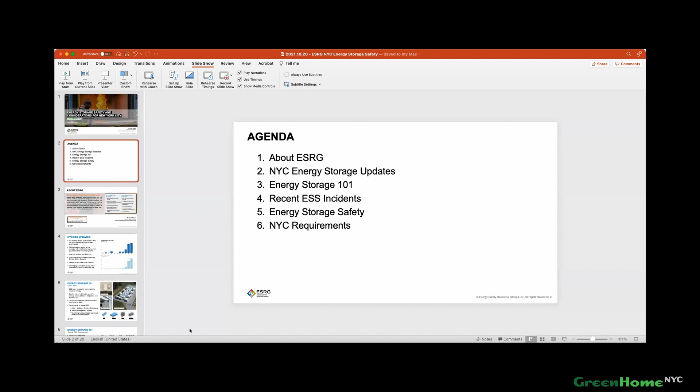I'll just keep flipping through these. Also, Mike, I think you might still need to share your screen. Yeah, it's like the first time I've ever done this, you guys. All right, can you see this? Yep. Right, good. Perfect. I just ate up a minute of time.

All right. So, like I said, Mike Bowes, Senior Project Engineer here at ESRG. We really focus on energy storage safety, and it's really what we were built on. As Crystal was saying, we're at a real inflection point right now in the energy storage industry, and recently there have been a lot of incidents regarding lithium-ion battery fires, which I'll be going over a little bit, but we really exist at the intersection of engineering and fire service, and about half of our team members are retired from the FDNY.

They were pivotal in creating a lot of the code developments in New York City for energy storage systems. We also do a lot of testing, UL 9540A testing, FDNY filing, expediting, ESS design, safety, etc. You can read all these on the screen.

Let's see. So, just as a background, real quick, I also am a volunteer here at Green Home NYC doing a lot of data for them. I've pretty much been working exclusively in energy storage safety in New York City for my short career, I suppose. I worked at Sustainable CUNY a few years ago before joining ESRG, so I was working really directly with the FDNY, the Department of Buildings, and the Mayor's Office of Sustainability to flesh all this stuff out and get the permitting streamlined for energy storage systems.

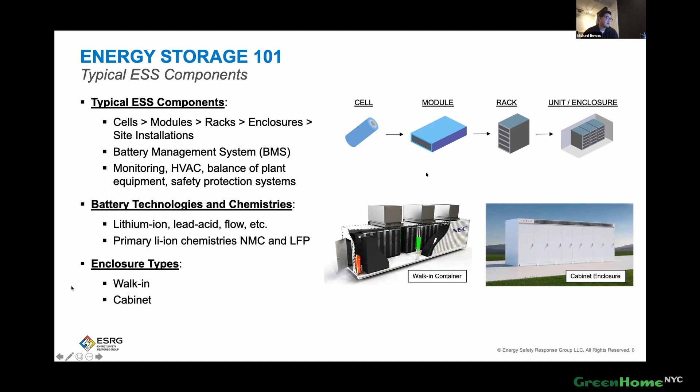Obviously, they're all important, but a big one that I want to point out was in April of 2019 in Surprise, Arizona. There was this battery, a dedicated use building that looks like an ISO shipping container, where a bunch of lithium ion cells failed, resulting in off-gassing, which we'll talk about. The fire department showed up. They weren't really sure what to do. They were sizing up the area. In the meantime, gas had been accumulating in there for hours.

They went to open up a door. The thought process is that they let in an amount of oxygen. The condition inside the container reached an explosive limit and blew up, injuring a bunch of the firefighters that responded. You see this chain link fence. One of the firefighters actually got blown through this fence, landed about 75 feet through it. So there are complications when safety is involved here. And up to this point, there's been very little understanding and training around emergency response for these systems.

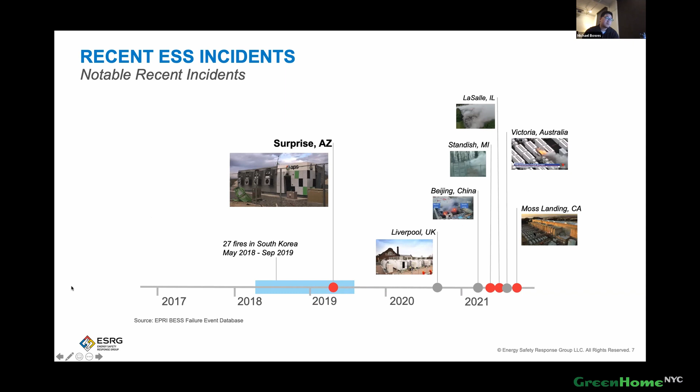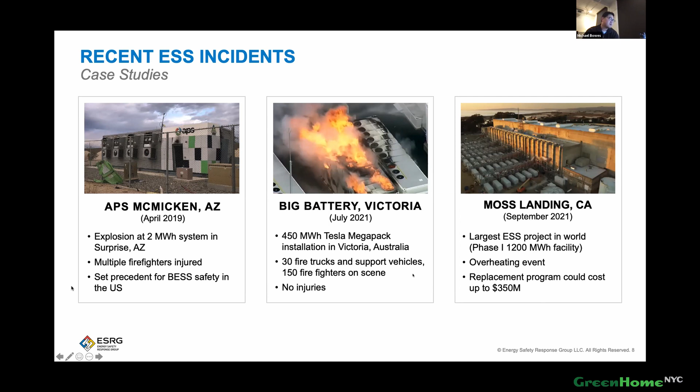Recently, we've also had incidents in Standish, Michigan, and Illinois, Victoria, Australia, and only a month or so ago at Moss Landing, the world's largest energy storage system. This is just another breakdown of those incidents. Again, firefighters were injured, and you're looking at a lot of losses in terms of investment. So it's on people's radars. Really, around 2019, we got a real burgeoning of interest in safety.

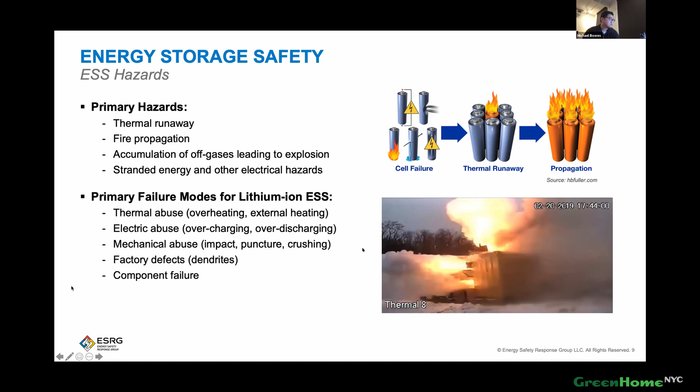There are a lot of different considerations when the fire department's showing up. There's going to be potential for stranded energy staying in these battery modules. You're not sure, if you're shutting it down, what effects that's going to have on the grid. Lithium-ion fires are also just very difficult to extinguish. As you might have seen in some of the Tesla vehicle fires, you'll have fires going on for hours, if not days.

There are approaches and defensive tactics that the fire departments are looking at, in which sometimes it's better to let these systems burn than be opening them up, interacting with them up close, and if there is an explosion.

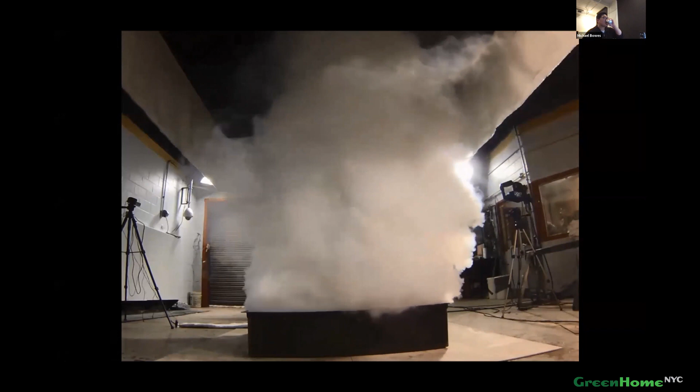Here's just a quick video of some testing. This is the off gas from failing lithium-ion cells. This might have actually only been one cell, but all of this gas, and I know I sound like a broken record, when that is allowed to accumulate in a confined space, and given a source of ignition, can explode. There are different methods of trying to mitigate these risks. Water has been proven to be the most effective for cooling.

Very few things can really stop thermal runaway once it's begun. There are some different gas phase suppression systems out there. You've got some like Novec 1230, StatX, that are good for electrical component wiring fires, things like that, that if they start, can help prevent fires from spreading to battery modules.

Also, there are means of exhausting these flammable gases out via exhaust ventilation systems, NFPA 69, or these deflagration vent panels, which have been big on FDNY's radar. The thought being, if a flammable or explosive atmosphere is allowed to accumulate and blows up, you're going to have the pressure vented in a safe direction away from any first responders approaching the area.

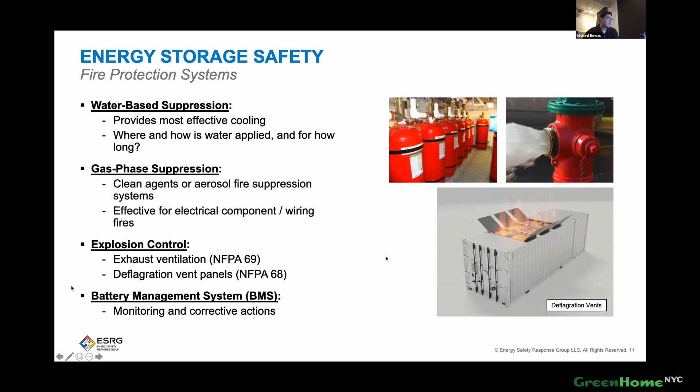Additionally, you have battery management systems for basically all these energy storage systems to monitor the cells, modules, and provide any corrective actions. The FDNY in 2019 provided to a lot of the industries a rule, 60801, for outdoor stationary storage battery systems. And so that took effect October 1st.

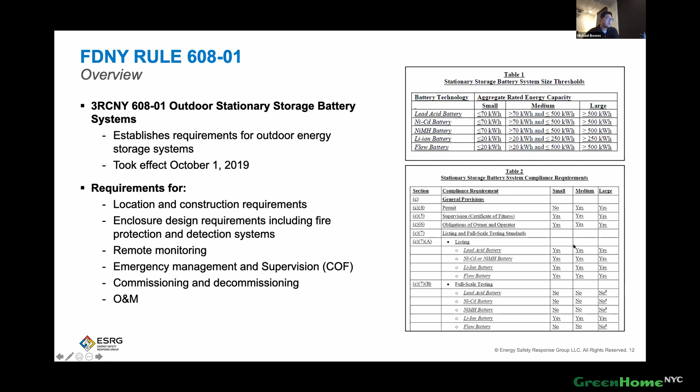So some of these requirements have been of particular note. We provide a lot of filing and expediting of these projects. We've dealt with dozens and dozens of these, and the same sort of issues keep coming up, namely having the right listings, the right certifications, and then UL 9540A large-scale fire testing, in which you're essentially driving battery cells into thermal runaway and seeing what gas accumulates, what the different temperatures are, and using that data to design a safer system. That's a real important sticking point for the FDNY, and they were really kind of pivotal in driving the industry towards using that.

Additionally, for new energy storage systems looking to be used across the city, you need a certificate of equipment approval. For that, you need to apply for TM2. So it's another one of these FDNY forms you've got to fill out. But having the right information for them to review is important and a big sticking point.

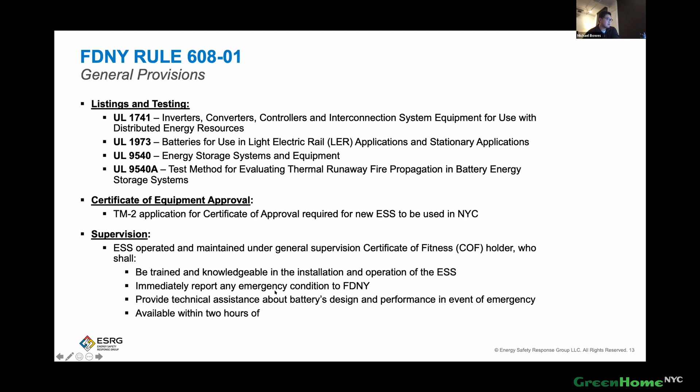Each one of these installations needs to be supervised by someone with a certificate of fitness, a B28 for energy storage systems. This person is going to be responsible for showing up to the scene if there's an incident. So therefore they have to be knowledgeable in the specific system, the different protections that are provided, the location, all of that. They're also supposed to be there within 2 hours of receiving a call.

Important things also are separation distances to different exposures. So that's lot lines, public streets, vehicle parking, etc. They require dry pipe water fire suppression systems designed in accordance with NFPA 15, as well as a big thing that people also have been missing, these fire department connections. They require 2 of them located at different points on the site, another one for redundancy in case they can't reach it, and they can come around to the other side of the site.

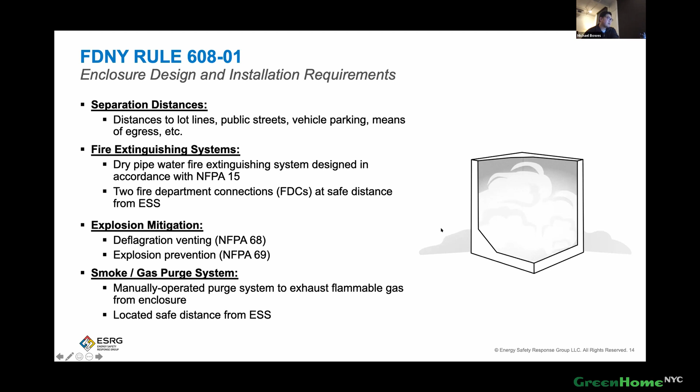And they have also required this smoke gas purge system, which is basically completely unique to New York City, required by the FDNY, so that if they do arrive on scene, they're able to basically flip a switch to exhaust this gas out of the enclosure. So again, you see here gas accumulating. Again, they show up, they have no idea what's going on, but they'll have the switch at a safe location so that if there is an explosion, they won't be impacted adversely by it.

Again, they have additional requirements for energy storage systems located on rooftops. So they'll have some different requirements there: requirements for temperature, vehicle impact, security.

Another important thing to have on your radar is 24/7 remote monitoring of the BMS system. That can sometimes be provided by different system integrators with their systems, but a lot of the time it's up to the developer to figure out how they're providing this, and a lot of people aren't prepared to provide this information when asked about it.

Different electrical component requirements here. 9540 listing is also another important certification that is honestly at this point fairly difficult to get just because of time frames for nationally recognized test labs, their queue being filled up essentially.

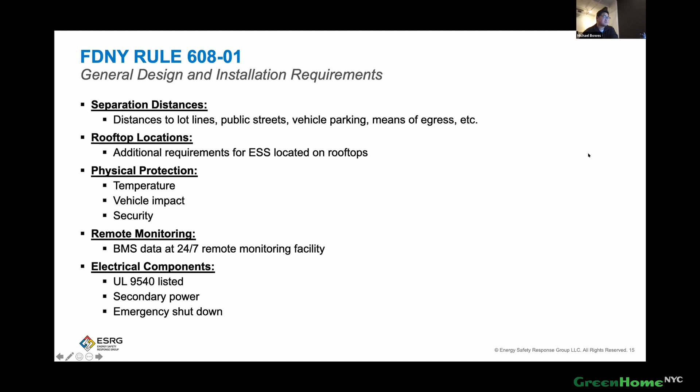Thanks so much, Mike. That was so interesting and a really pressing aspect of energy storage that I don't think we talk about enough. We really have to balance out the need for safety and how we're going to get there with our excitement for the energy transition.

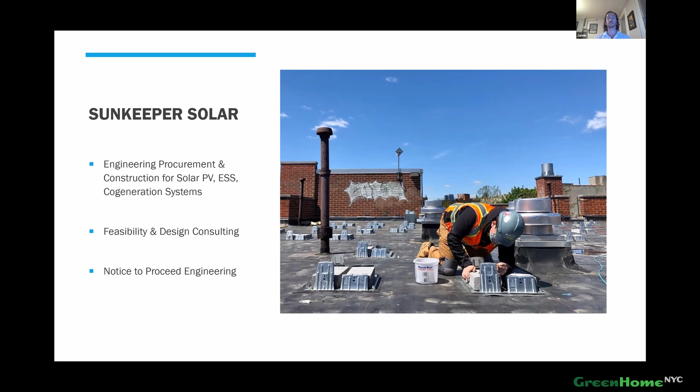And so in order to get it permitted, I'm going to walk you through a few of the first steps. Mike did a great job of bringing up a lot of the issues that you face on the front end, so I'm going to go through how we address a lot of those issues.

So it all starts with selecting your energy storage site. As you can see from these two pictures, one of them is a better site than the other. I think everyone on this call can identify that putting an energy storage system in the middle of Times Square may not be as easy to get permitted as putting it in an empty lot like the one on the right side of our screen.

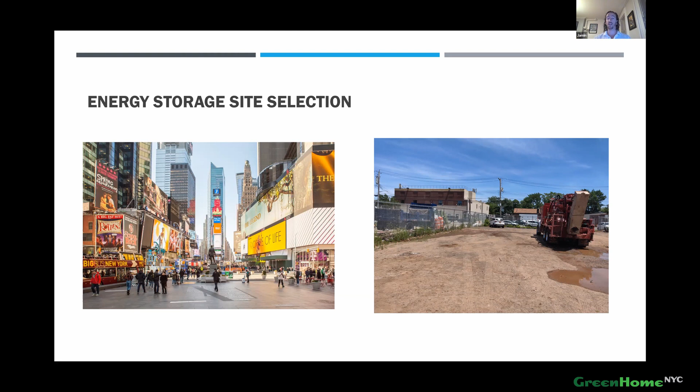Now, this is a pretty easy comparison, but a lot of what we do is helping developers and real estate owners identify the best location for their energy storage system from a safety perspective and from a constructability and therefore a cost basis. Once we go through finding the right site and the best place on your site, we go into our energy storage system selection.

And so there are lots of different options out there. And also, as Mike had brought up in his presentation, there are lots of certifications that are required for New York City, and really a lot of those are not required elsewhere. So we make sure and we look at potential products to help owners identify which type of product they want to go with.

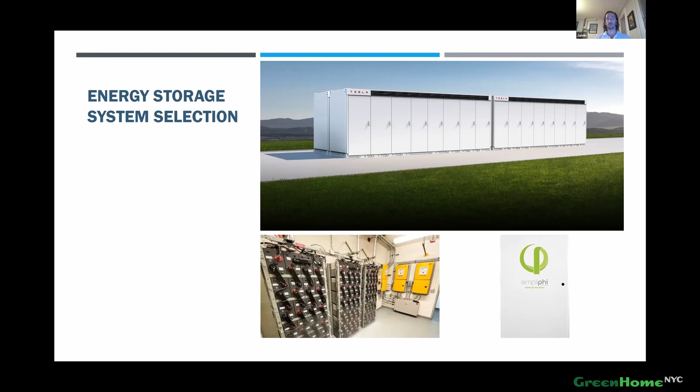We have spent a lot of time working with the Tesla product, which is shown in the top right. The product in the bottom left is a lead acid solution that was actually put indoors, and on the right is a Simpliphi solution.

Once we know where we're putting our system and also what type of product we're going to use, we get into our civil work, our geotechnical work, our environmental work, and our structural engineering. So what a lot of that means is actually heading out to the site. As Mike had showed, there has been a large boom as of late in energy storage systems. And a lot of those, due to the safety factors that Mike brought up, have been going on areas

with more space. So as a part of that, if it's an undeveloped lot, the very beginning is typically us going out, taking care of surveys, doing actual borings in the site to figure out what's there, taking environmental samples to make sure that the site can be developed.

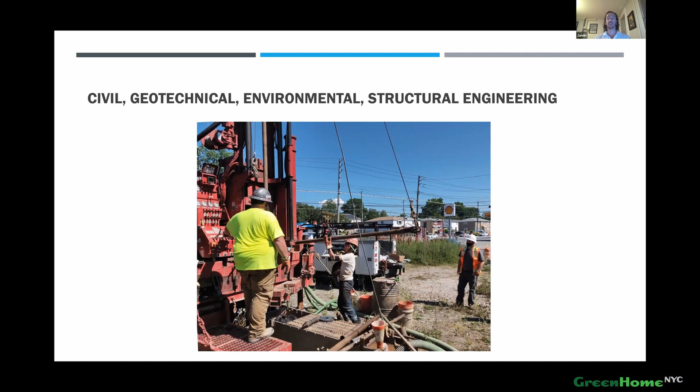And then finally, a very exciting part is the actual permitting and expediting. So there are multiple fire department TM1 applications that need to go in. The number of them and the type of them really depends on what type of system we're doing. There are OTCR2 applications, DOB applications, DEP applications, Con Edison applications, and potentially more if there's any sort of other environmental issues or wetland issues or anything else that could be brought up.

And it's really important when you're developing these projects, right, to identify all of the different AHJs you're going to have to potentially interact with and get them started, because timeline is important, and many of these depend on one another. So you don't want to be held up on getting your letter of conditional acceptance because you haven't started going to a different entity yet. And then at the very end of all that, we get to move into the construction phase.

And so now I just wanted to focus on one project that we were working on in Queens. If you remember my first slide, I was showing a picture of a pergola type system on top of a building. But what you didn't see there, because it's not shown in the picture yet, is the fact that we were actually putting an energy storage system next to it. And Sunkeeper Solar was a subcontractor on this job. And unfortunately, we didn't get time to get our client on board to come join us. So there is some information here that I won't be able to share, but I will share as much as I can with you guys.

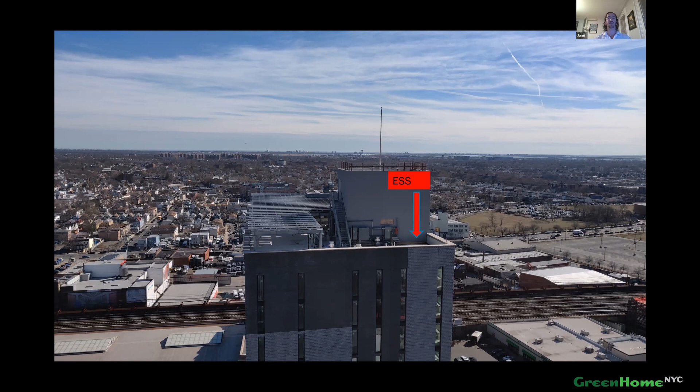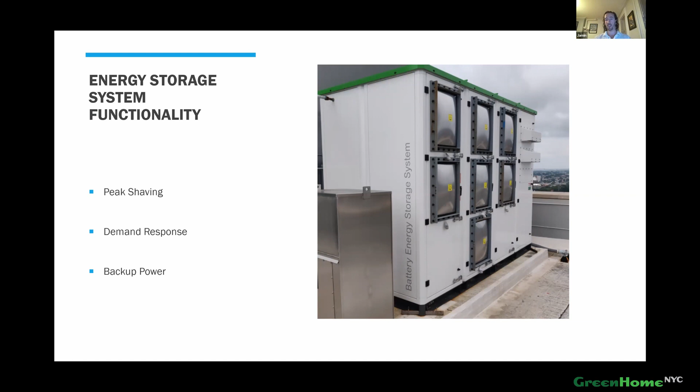And here's the energy storage system that was later installed. And the main thing that I want to bring up to everyone here is that making these systems work in New York City is possible. But it does require enough leeway and enough time in order to make it work. This was a particularly interesting project. The energy storage system is actually used for peak shaving, some demand response, and also backup power. So it was able to help this building in multiple different ways on the economic side and on the resiliency side.

One thing I always like to try to bring up to a group is what was our biggest challenge. And on this project, as it occurs on many others, it's the permitting timelines that you need for the FDNY ESS TM1s and the permitting timelines for the OTCR2 applications. And one question that I'll bring back to the group as a talking point is really just a big part of these permitting timelines, and the reason why they're extended, is the lack of personnel that are available to review them.

So there are tons of applications going in, and also a lot of the individuals that are charged with reviewing these projects, right, are not just doing energy storage work. They're reviewing lots of other types of applications. So they end up with very large backlogs. And we as an industry, right, are happy to be accommodating, and we can certainly move fast, but we need to be able to have a quicker back and forth to move this industry forward.

And I will stop there, and later on allow people to ask questions on the project, kind of give you guys more time to do that rather than me guessing as to what else you'd like to know.

Thanks, Kristen. And our last speaker is Alex Norman, a vice president at Distributed Solar Development, and he'll be sharing with us more about solar canopies. So this will be the solar perspective we're bringing tonight. Yeah, thanks for having me. Appreciate the opportunity to share the front lines of what I do every day, which is the design and engineering and construction of solar canopies.

Similar to the energy storage, I think we've seen a considerable uptick in demand for canopies at our company, primarily because we've been able to achieve a certain cost point that has made it possible. As with developing all renewable distributed assets, we're always challenged with the cost considerations. And so what I figured I would go through here is show some of the more current types of structures that we've been designing for some of our built projects,

as well as addressing some of the common considerations that we have to make early on in a project to establish whether or not a site is viable, which I think is one of the biggest barriers to more people in the solar industry taking on canopies confidently. There's just an added level of complexity and diligence required, and there's a lot of critical things that have to be identified up front, like any solar project, but some additional nuanced ones that are specific to canopies.

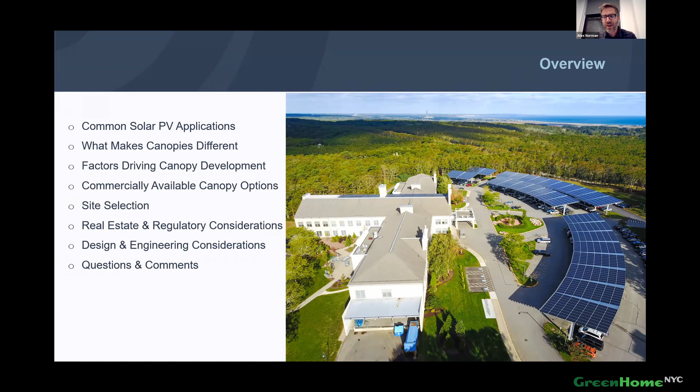So like I said, here's just a high-level overview of some of the things we'll talk about. Sometimes I take for granted whether or not people have experience in the solar industry. I've been doing it for about 13 years now, designing and building solar projects. But I feel like everybody has some idea of the most common solar, right? You've got ground mount and rooftop solar.

Both of which have their own specific challenges when it comes to siting, engineering, getting approvals, and all of that, whether it be structural on existing buildings, reviewing structural and getting roof warranty holders on board, or if it's ground mount with endangered turtles and whatnot that live on these green fields.

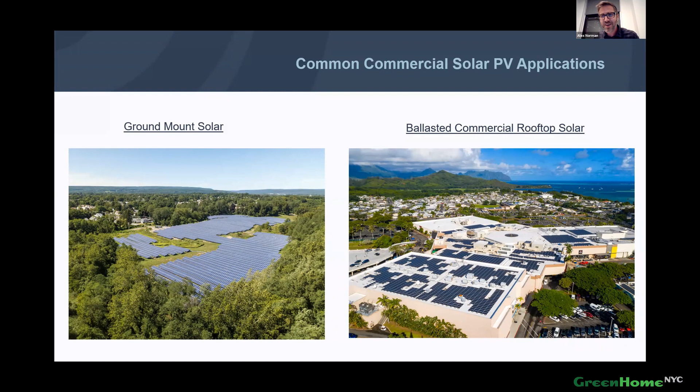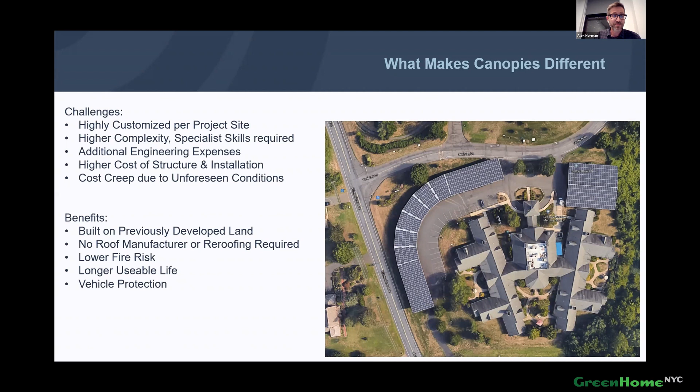They did a lighting retrofit. They have the existing rooftop system, and then we add the canopies in the parking lot. Which is actually quite a feat, right? In my opinion, that a large retail store of this nature could actually be net zero or even energy positive with an on-site system.

And so obviously the best thing going for canopies is if you have a large load and an existing service at a building like this, and you have a large parking lot, it is an ideal situation to put a solar canopy system. Not everybody has a good open roof, but everybody has a parking lot that they would love to put some shade on. It's highly visible, so people make a big PR.

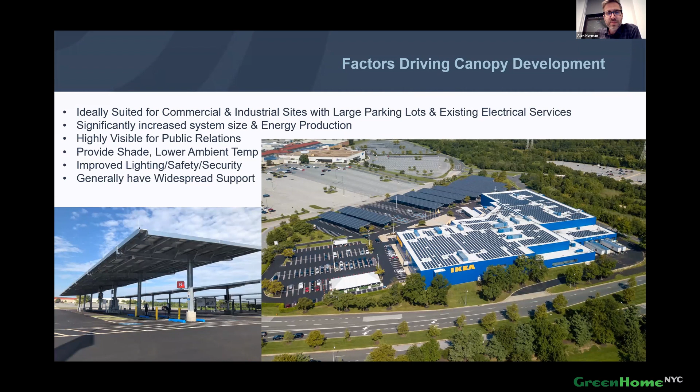It's another way to sort of make solar sexy again after everyone's kind of like, okay, it's solar, we get it, right? But it also shades the parking lot and lowers the ambient temperatures around. And again, they just generally tend to be viewed positively and favorably by everybody who sees them, as long as they don't cause functional problems. And I can touch on those in a minute.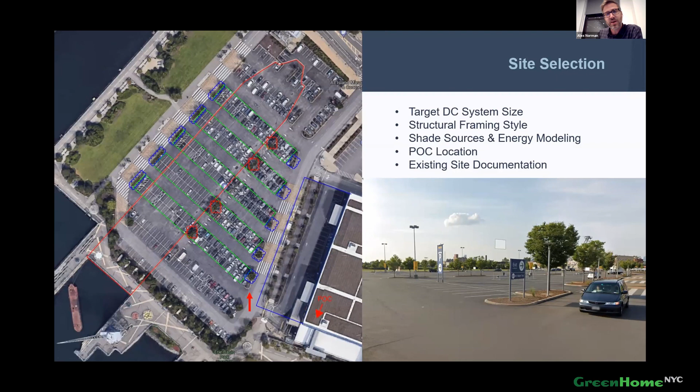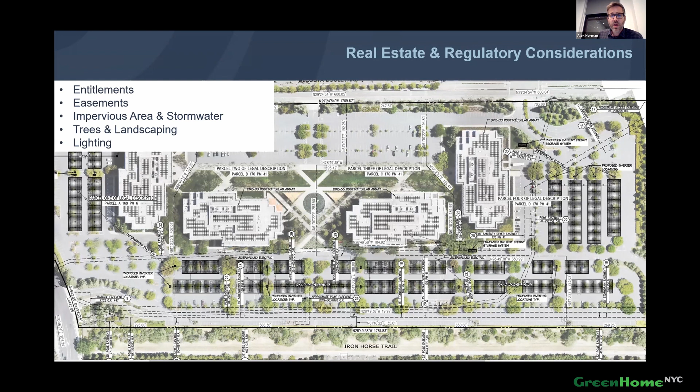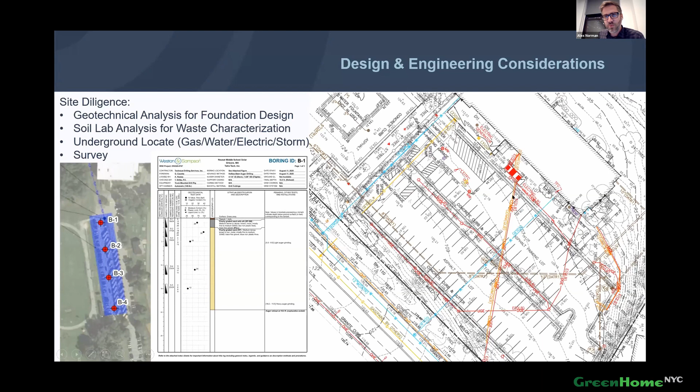Anyway, and then on the right here is just a mark out of really just the mess of which parking lots can be covered with electrical, communication, stormwater, gas, regular water. And this is actually, I think, a 12-story apartment complex down by DC, just for reference, right? But I threw a picture here of how we overlay a canopy onto an area like that, right? The magenta circles are our foundations.

They're spaced for optimizing the steel structure, and then we have to adjust it to try and conform and miss all of the existing utilities, right? You got gas here on the left. We're about 5 feet away from that, which is a little close for comfort, but we do it. Here water in the middle, even closer. So we typically pothole, we suck it out and locate it before we start drilling anything. But you can kind of see all this.

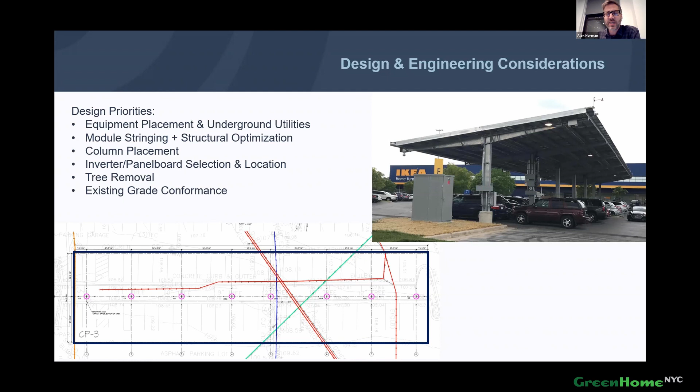Column placement: the fewer columns, the fewer frames you have to fabricate, the fewer foundations you have to drill, the more cost effective. And then of course, you got to take other civil considerations like matching grade and making sure your canopies don't have kinks. You want it to be a nice level canopy surface. Just a few other pictures just for fun.

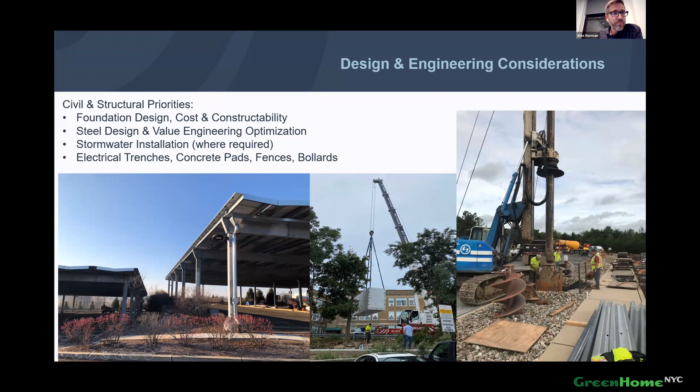Yeah. So this is again a little bit of context for how big the drill rigs need to be and the type of equipment that they use. This is actually sleeve drilling that they're doing right here. They're drilling in a detention basin. It's all gravel, and so they had to use this sleeve drilling in order to keep the gravel from collapsing into the hole. Again, it's kind of more of the same.

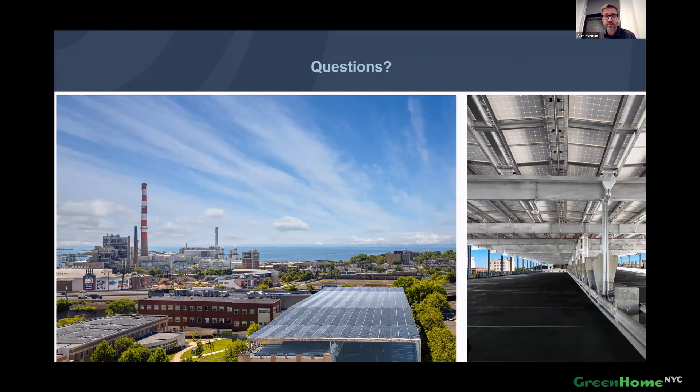But yeah, that's the end of my presentation, and happy to take questions if anybody has any. Otherwise, I'll pass it back to you, Crystal.